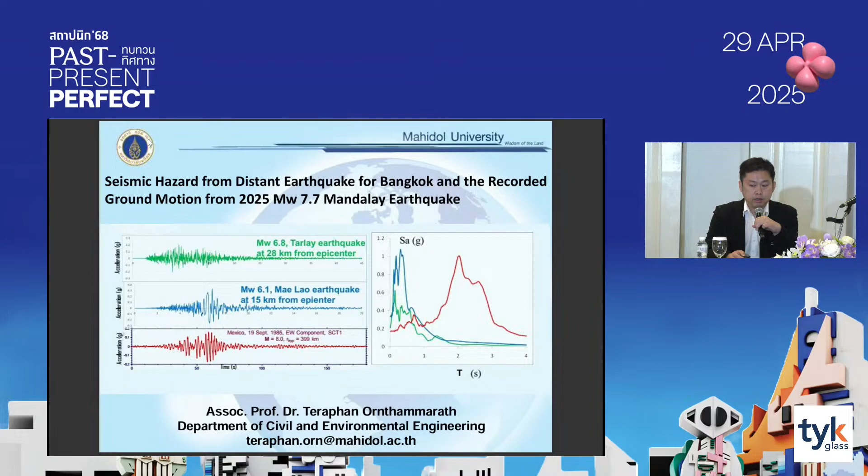In Bangkok, we did not have high-rise buildings, we have only small buildings, and the people in Bangkok could feel it quite strongly, causing alarm to the people, and people ran from their houses into the street. So it's exactly what we observed last month. So it's not something that we didn't expect. We expect this kind of event, but we cannot tell when it's going to happen, but we know it's going to come.

And in 1930, on 5th May, this is the event in Myanmar, 7.3 in Bago, along the Sagaing fault. That is very similar to this event also, but from different segments of the same fault.

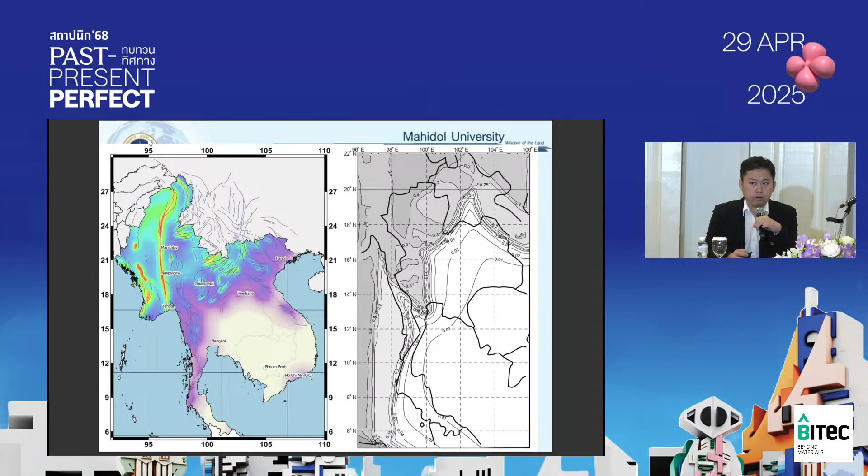This is the major cities in northern Southeast Asia that have different seismic hazard, like in the red line that is Naypyidaw, and on the blue line is Mandalay. So at the same hazard, we expect that Naypyidaw and Mandalay would have the highest seismic hazard, mostly from the Sagaing Fault. Other major cities in northern Southeast Asia also have different distributions of the hazard.

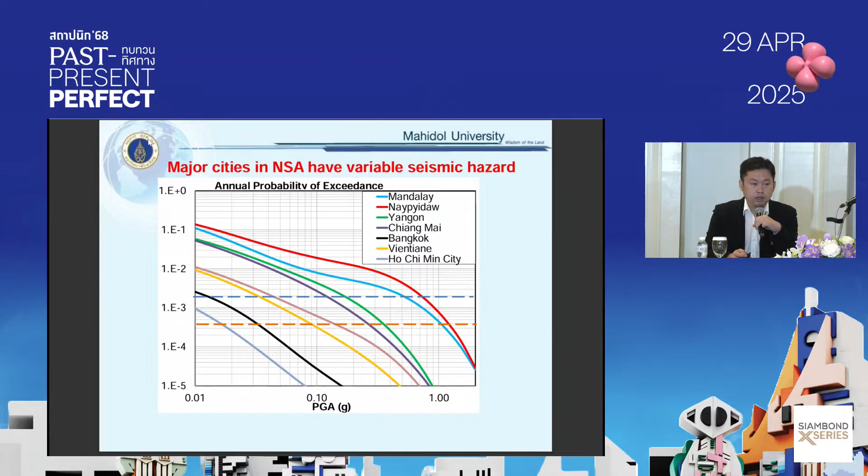And when we do the deaggregation, meaning when we know what is the level of the hazard, we want to know what is causing the earthquake that's going to cause the hazard. So this graph might be a little bit difficult for you to understand, but I would explain.

On one side you will see the magnitude, on the other side, the X axis, you will see the distance. So for Mandalay and Yangon, the hazard mostly comes from large magnitude earthquakes, like magnitude 7, at very short distance. That is what we expect from the Sagaing Fault.

But if we look at other cities like Bangkok, on the bottom, you see that for the peak ground acceleration and spectral acceleration, it always comes from distant earthquakes. So based on our model, we know that the hazard for earthquake in Bangkok is going to come from distant large earthquakes. It's not going to be a small or large earthquake inside Bangkok, because Bangkok does not have an active fault. So when we know this, this is the hazard that should be considered in the model.

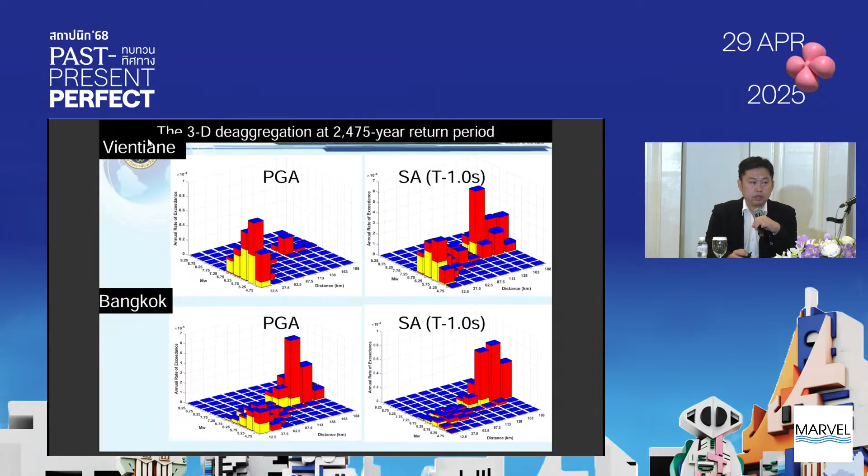So what did we do when we try to give the seismic design code for the engineer? Before going to that, I would like to take some time to talk about the ones that we're still afraid are going to occur.

So the first one is the Sagaing Fault that already occurred, the 7.7. Another one is Kanchanaburi, that is the Three Pagoda Fault. The one that we think might have the potential is the subduction zone in Myanmar.

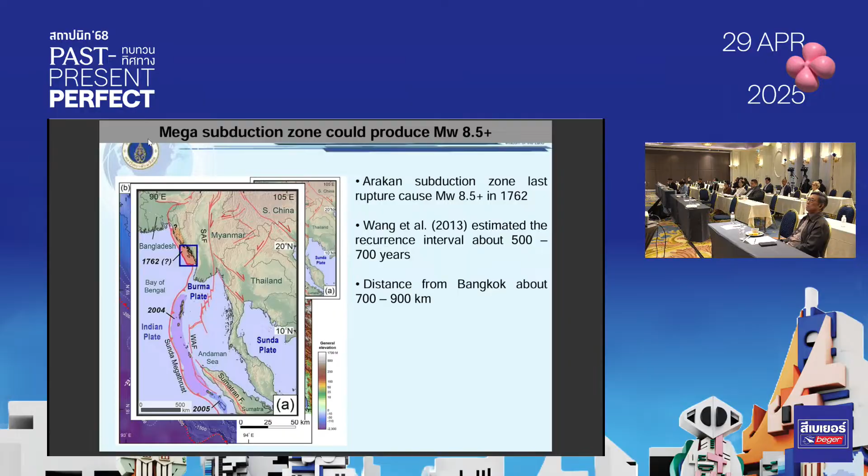In the past, there is a record in 1762. It generated a magnitude greater than 8.5. Some studies found that the recurrence interval is about 500 or 700 years, and the distance from this subduction zone to Bangkok is about 700 to 900 kilometers.

And this is the evidence from the fieldwork that they did. They went to the coastal area and found an uplifted oyster reef that had been uplifted due to the earthquake in 1762. The uplift is about 1 to 6 meters. If we consider this caused by that earthquake, they did carbon dating, and the carbon dating also shows that this is at the same time as the historical record.

So it is confirmed that the subduction zone is there, and it's still quiet. It hasn't reached its recurrent interval yet, but that is the thing that we understand should be considered when we do the seismic design.

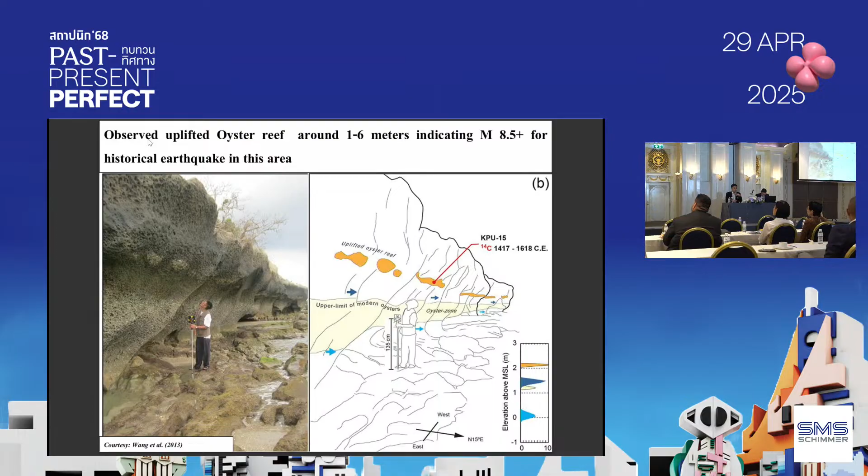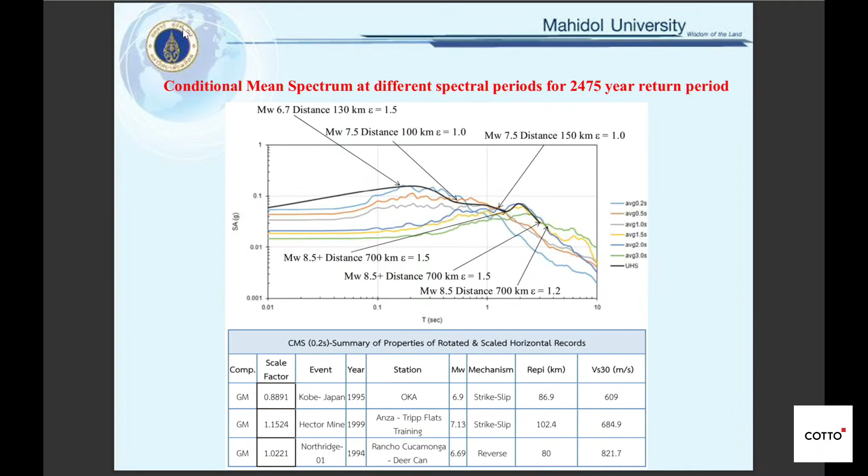So when we do the seismic design code, engineers usually use response spectrum, and different response spectrum causes vibration in different structures. Like for the short period, it would cause large vibration for the small building, but at the long period, like 1 second, 2 seconds, and 3 seconds, it would cause vibration in the tall building. So for 1 or 2 or 3 seconds, this is the distant large earthquake, like subduction zone earthquake.

And then we select the ground motion that fits well with what we consider would be like magnitude 8 at a distance around 7 or 800 kilometers away. So this is the one that we use to develop the Bangkok seismic design code.

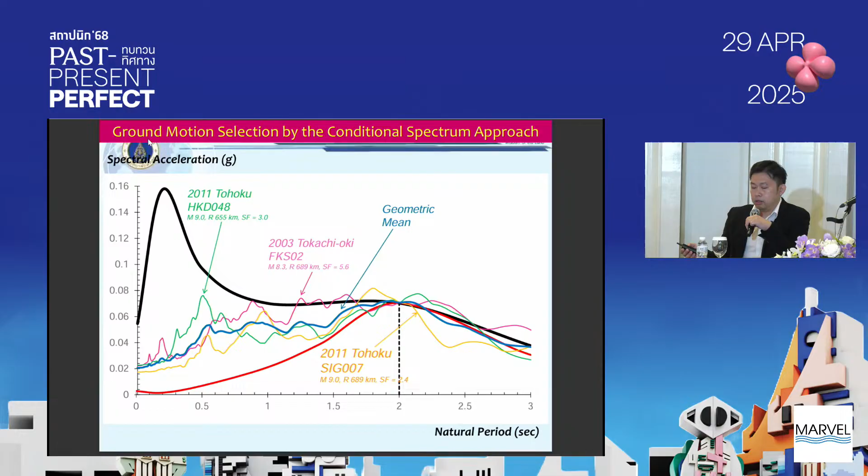And this is the response spectrum from the ground motion that we think could have impact in Bangkok, but this one is on the rock. After that, we do the measurement for the shear wave velocity in Bangkok, and then we do the ground response analysis to consider the soil amplification.

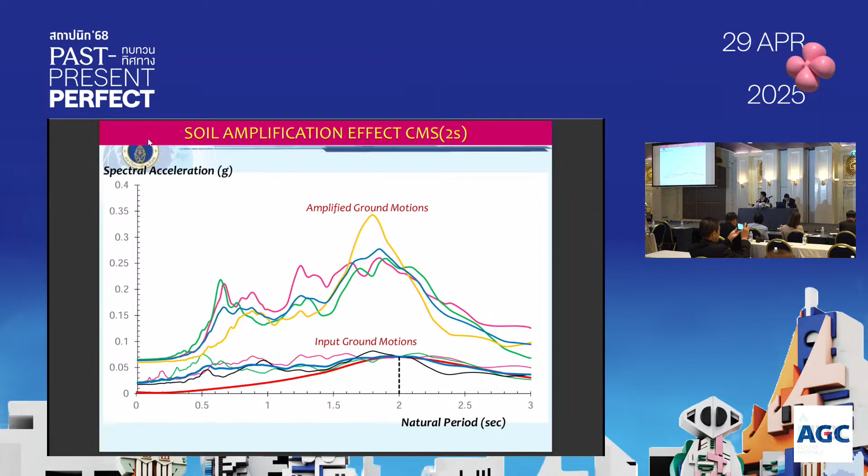So this one is on the bedrock, and then it has been amplified by using the data that we have. So the ground motion in Bangkok has been amplified due to the soil model that we have. And then this is the input ground motion on the rock, and this is the amplified ground motion.

So this one is the one that we have studied, and then we use it in order to tell the engineer that this is the level of design that you should use. And this blue line is the average. That is the value that engineers have been asked to design according to our seismic design code.

When we published this, a lot of engineers asked how reasonable this seismic design spectrum is, because it's quite large, and people in Bangkok did not feel earthquakes that often. So there is some resistance, and engineers start to question more when they need to put more reinforcement into the structure. But anyway, this is the seismic design code in the Bangkok area.

We put it in different zones, and the downtown of Bangkok is zone 5. So it's quite a different spectrum. If you consider a normal spectrum from the textbook, it would be very high value at a short period. But you can see that the seismic design for Bangkok amplifies the long period like 1 sec, 2 sec, or 3 sec. So it's quite an unusual spectrum compared to the design spectrum for many places around the world.

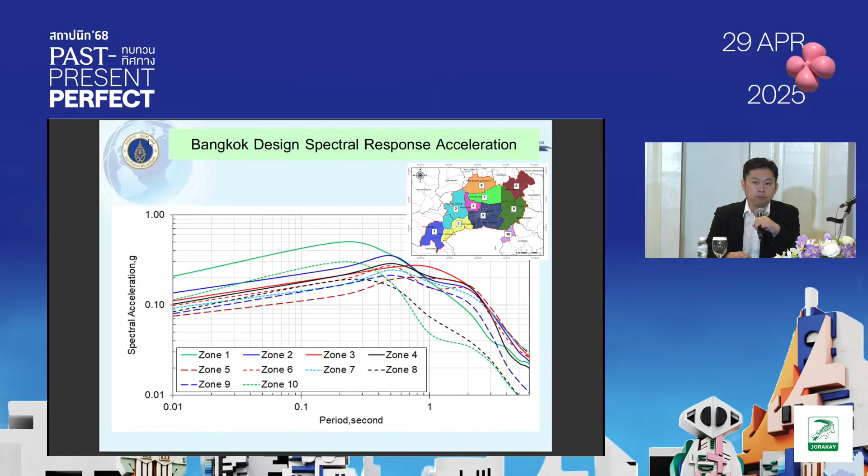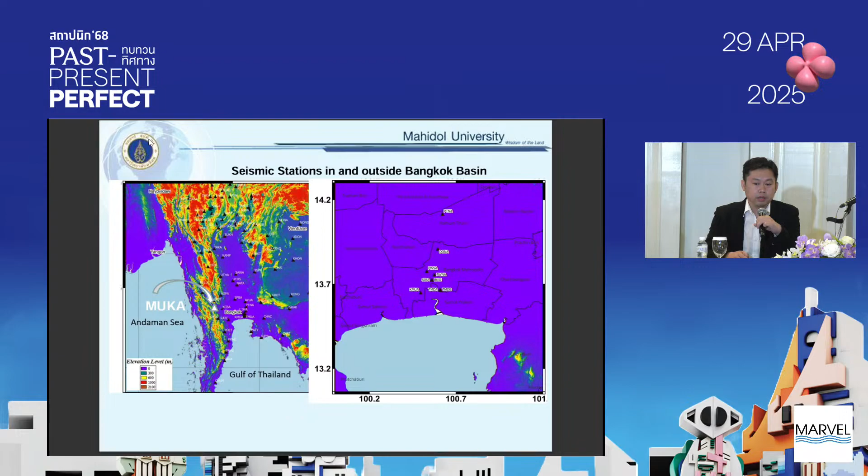Okay, so let's talk about last month's earthquake and what we observed from the record that we have, and then let's compare with our seismic design spectrum. So luckily in Bangkok, we have a number of seismic stations operated by the Thai Meteorological Department. And I would like to compare this spectrum with the one that we have stationed in Kanchanaburi.

Kanchanaburi is the station on rock, so there's a difference from the basin. What you see, the purple line, is the elevation model. You can see that the central plain of Thailand, including Bangkok, is a low-lying plain, that is a sedimentary basin. So outside Bangkok, that is Kanchanaburi, is already outside the basin. So we're going to compare the effect of the basin and without the basin.

So this is the ground motion that we recorded in Kanchanaburi. We plot it on the same scale, and this one is recorded in Bangkok. So you can see that the peak ground acceleration in Kanchanaburi is just 0.006 G, very low. But in Bangkok, it goes to 0.02 G. So the amplification is real. We see the amplification about 3 times.

But not only that, the duration in Kanchanaburi is just about 40 seconds. But in Bangkok, we see the duration amplified to about 150 seconds. So Bangkok is farther from the earthquake, but we feel larger ground motion. Not only larger ground motion, we feel it longer. That is the perfect storm for the tall building.

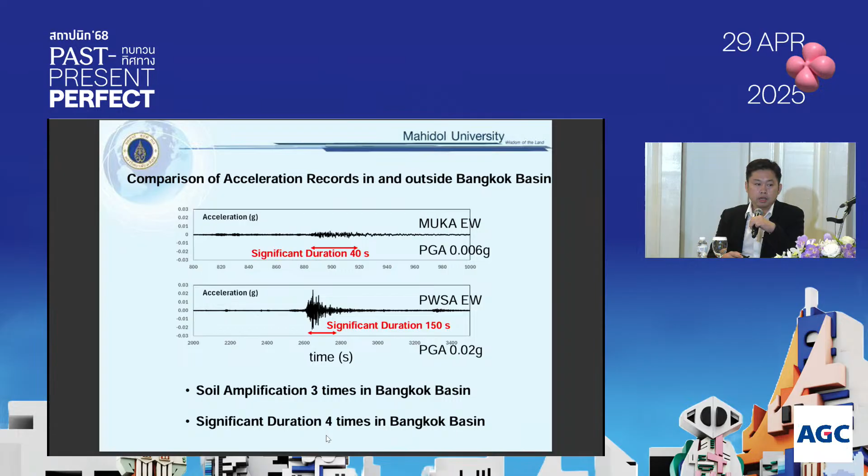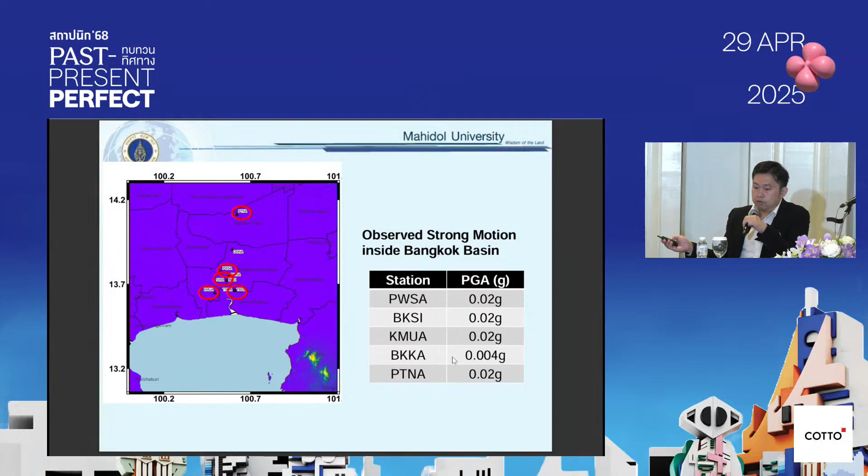And luckily we have a station inside Bangkok, and this station can record the peak ground acceleration mostly consistently about 0.02 G. There's one station that is quite low, maybe there's a malfunction. We need to do more investigation.

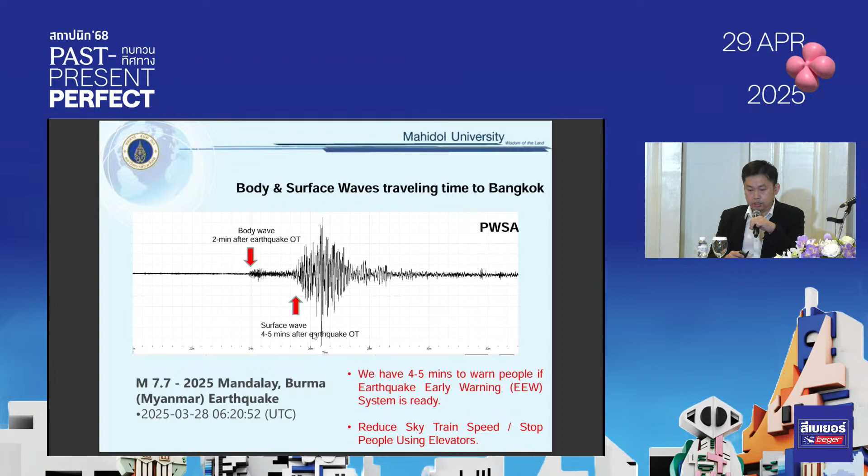So in Bangkok, if we develop an earthquake early warning system, we have a high chance that we can succeed in warning the people in Bangkok maybe 4 to 5 minutes ahead. So we can reduce the sky train speed or prevent people from using the lift. So this is one thing we may be able to improve in the future.

And this one is a record on the ground. So it means that if you were on the ground in Bangkok on that day, you would feel the large shaking for about 3 minutes. But if you're on a high-rise building, you might feel it longer and stronger than this. So if we compare with the USGS value of 0.02G, you might feel like MMI 4, a little bit dizzy if you stand on the ground.

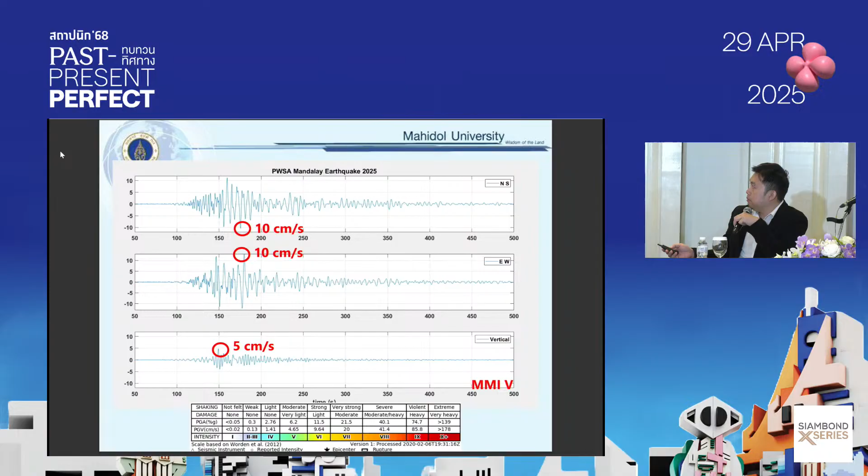And this one is the peak ground velocity. We usually compare the damage with the velocity. For the velocity, we see about 10 centimeters per second for the north-south, and east-west also, but for the vertical it's a little bit lower. For the MMI, it would be 5. So people might feel quite strong shaking for this earthquake.

Well, it's the same as what we have been reading, right? From the history, like in 1930, they must have felt the same thing as what we felt last month.

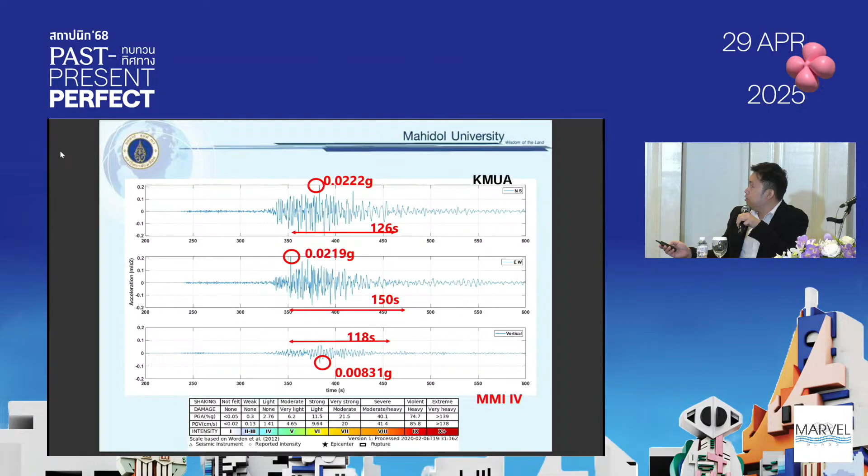And this is from another station, also the same, the graph is consistent. It has a long duration, almost 3 minutes. And the peak ground acceleration is also the same, like 0.02G. And this one is the peak ground velocity, the same.

And if we use the data from the USGS, they also say that inside the Bangkok area, they feel about MMI 5, and outside it, they feel about 4. So this is the record, and the intensity that people felt is the same. So this is confirmed.

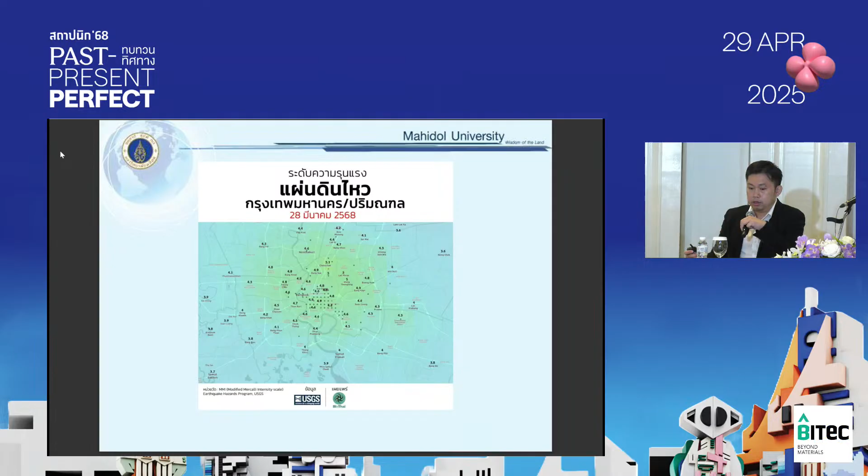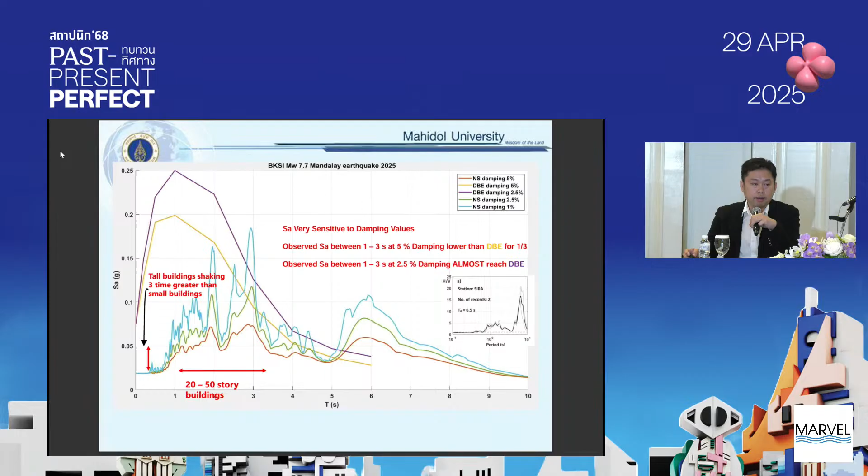So I would say that most of the tall buildings in Bangkok, if designed correctly following the seismic design code, should not have much damage to the structural part, but they might have some damage to the non-structural part, like cracking of the infill wall. The structural part should be safe.

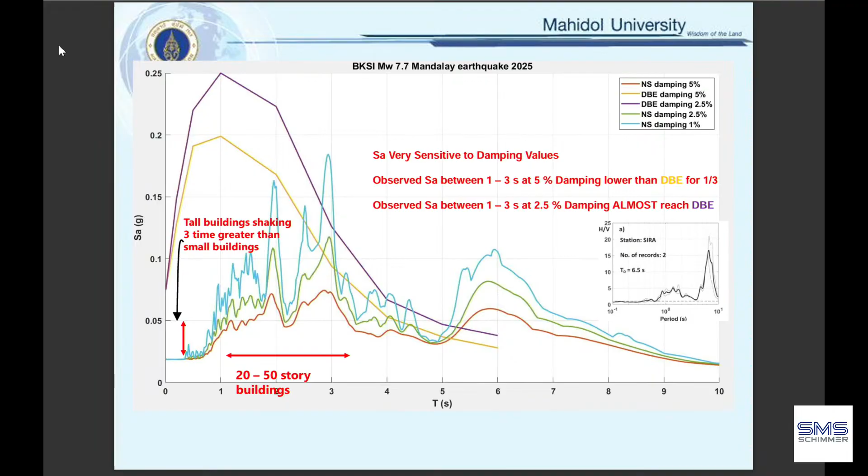Because when we look at the value, it's still below, but it looks quite too close. After this earthquake, we have a lot of data, so maybe in the future we're going to improve our seismic design code again. We have to revise it based on the new information that we have.

Because in some buildings, like tall buildings, we do install instruments, and the damping could be around 1% also. So we might need to have a new spectrum for 1% damping high-rise buildings. And also, we might need to extend our spectrum to be more than 6 seconds, because currently we can just provide until 6 seconds, but we see the amplification at 6 seconds also.

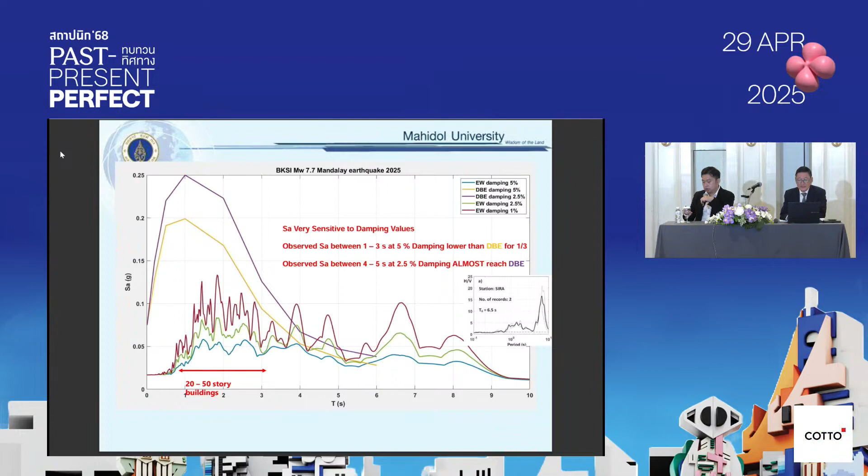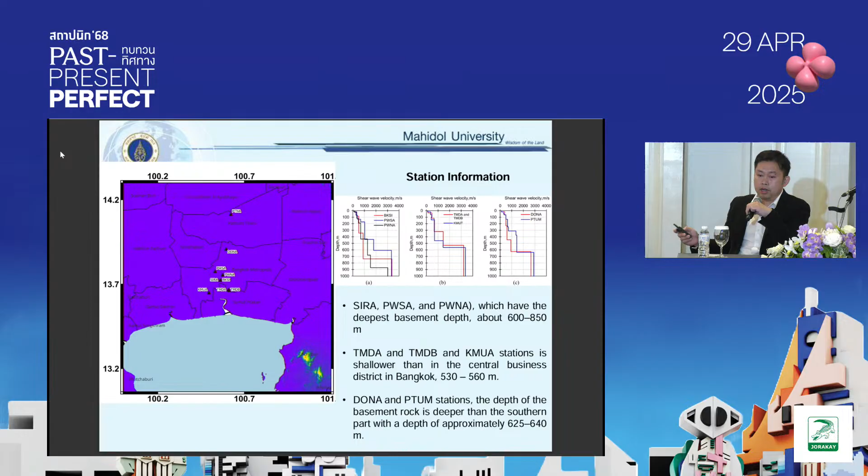So the depth varies, and the depth variation also controls the fundamental period of the basin. Like this is in Pathum Thani, you can see that the zigzag is quite low, and then the amplification for different damping is also quite low compared to the one inside Bangkok. So this is what we're going to study further, that maybe there is some difference in amplification at different locations also. This one is north-south, this one is east-west.

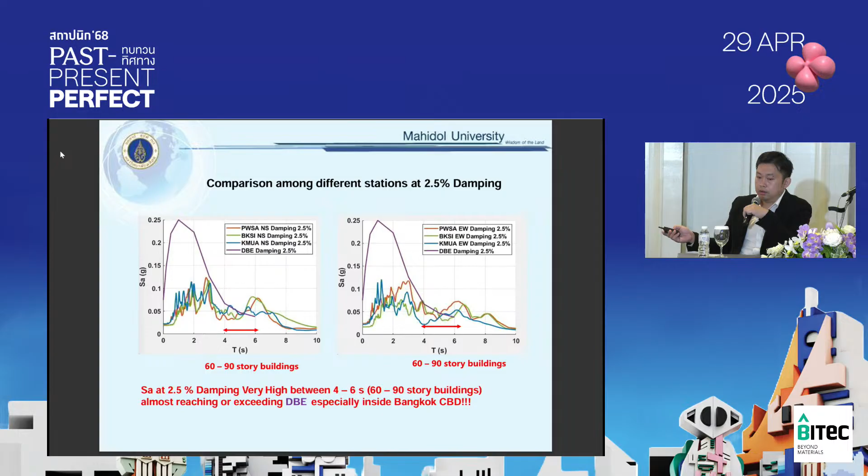And this is the comparison for different stations. It looks more or less the same, but everything is still under the seismic design code, except in the long period range where we don't have much, like more than 90-story buildings.

So to sum it up, I would say that Bangkok seismic hazard for high-rise buildings is controlled by large and distant earthquakes. Bangkok seismic stations amplify both amplitude and duration compared to stations outside the basin. Most long period energy content is located when the surface wave arrives. The high spectral acceleration could be observed at low damping, like for tall buildings, 2.5% or 1%.

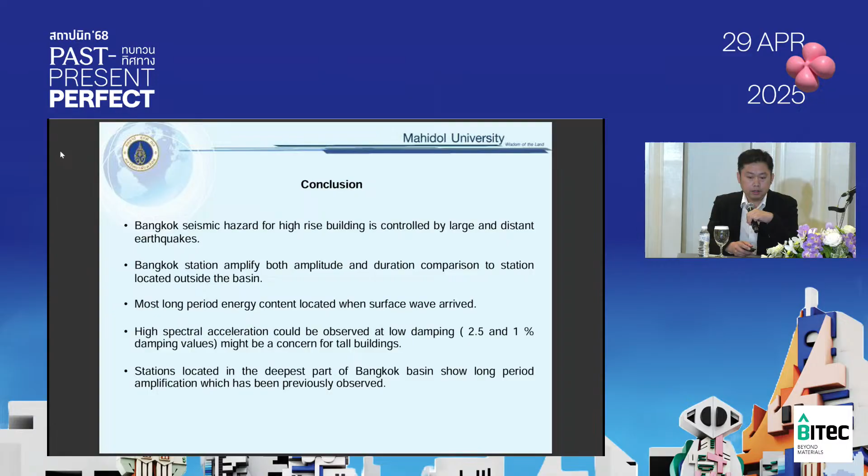Then we need to revise the seismic design code again. Stations located in the deepest part of the Bangkok basin show long period amplification also. So this is going to be the one we need to work more on to protect our tall buildings in Bangkok. Thank you.

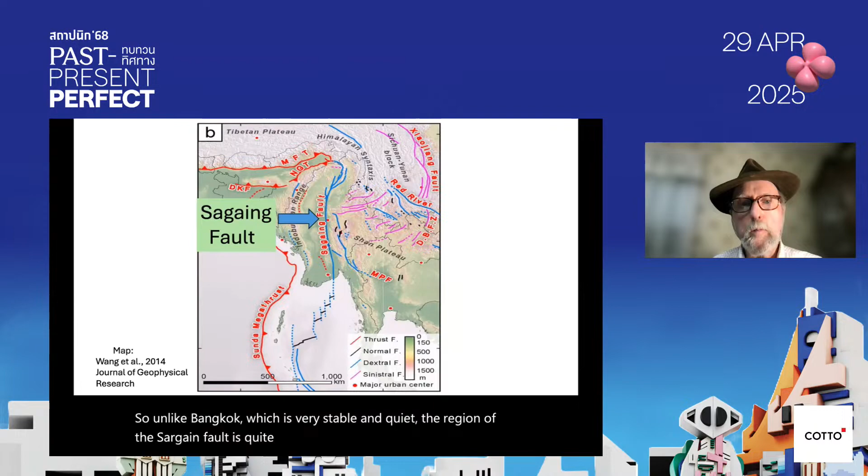We will see this location map probably several times because it's an excellent summary by Wang et al. from 2014, showing in blue the Sagaing Fault and in red some of the surrounding faults. So what's going on here? Why do we have such strong earthquakes at this location?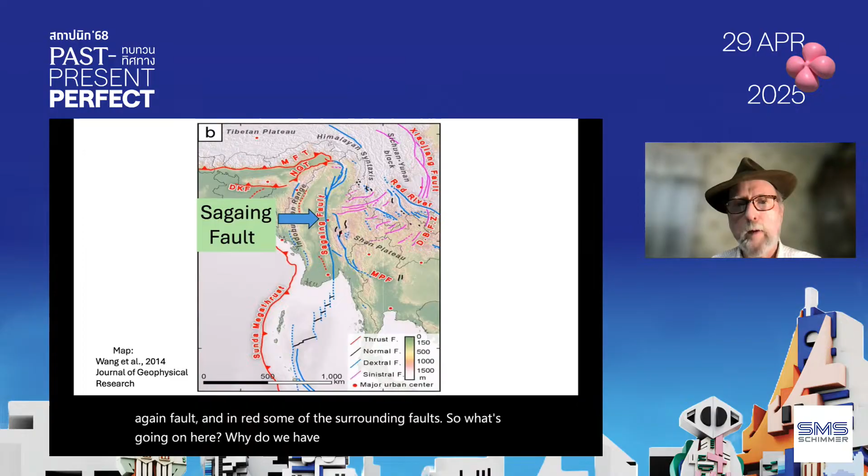As you'll recall from your studies, India is moving north into Asia, colliding to build the Himalayan mountains and the Tibetan plateau, while China and Thailand are moving to the south. The Sagaing Fault is the strike-slip fault that accommodates the motion between India and Southeast Asia. So it's a very important, fundamental fault—very active, with constant buildup of strain.

Let's take a look a little closer at this fault where it occupies central Burma. Here we see a pretty complicated diagram with the Indo-Burma range off to the west, the Burma Basin in the center of the image, and the Sagaing Fault on the east side.

The rupture is shown in red. One of the reasons why this fault and this earthquake was so damaging was that it occurred in a very highly populated region, a relatively flat-lying agricultural region with a big population density.

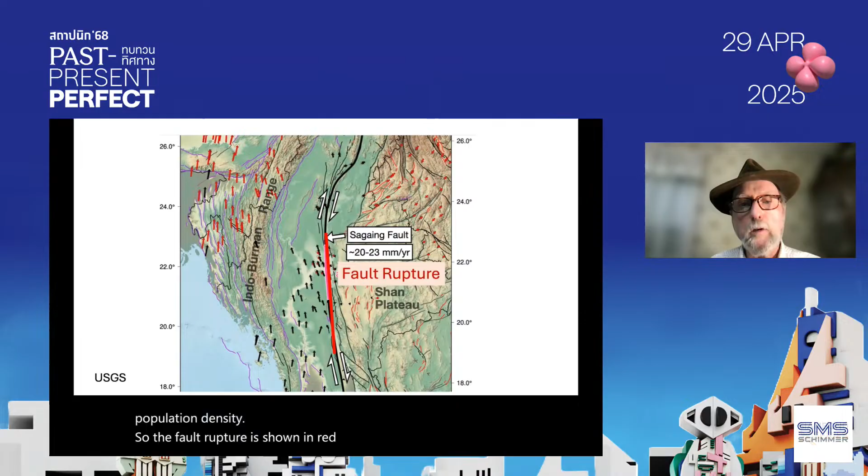The fault rupture extends for about 400 kilometers. The Sagaing Fault has a buildup of strain of 20 to 23 millimeters a year—let's put that in simple terms, about 2 centimeters a year. That means in 200 years, there will be an accumulation of earthquake strain reaching 400 centimeters, that is 4 meters. That's enough to create a magnitude 7.7 earthquake, 4 meters of slip on an important fault.

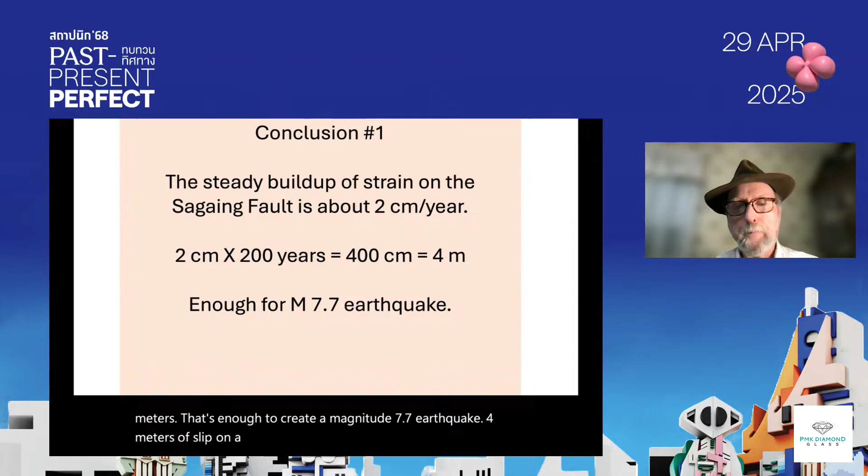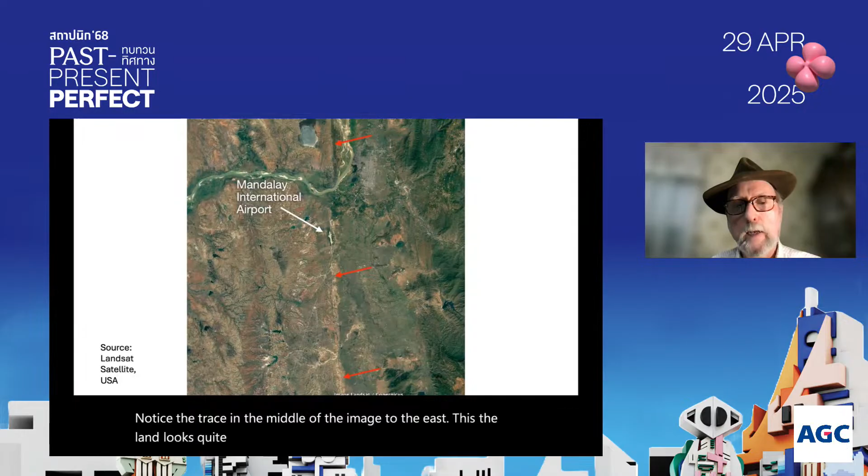This is exactly what happened on March 28, 2025. We can see this fault very easily from Landsat satellite imagery. Notice the trace in the middle of the image. To the east, the land looks quite different—a lot greener, a lot more vegetation.

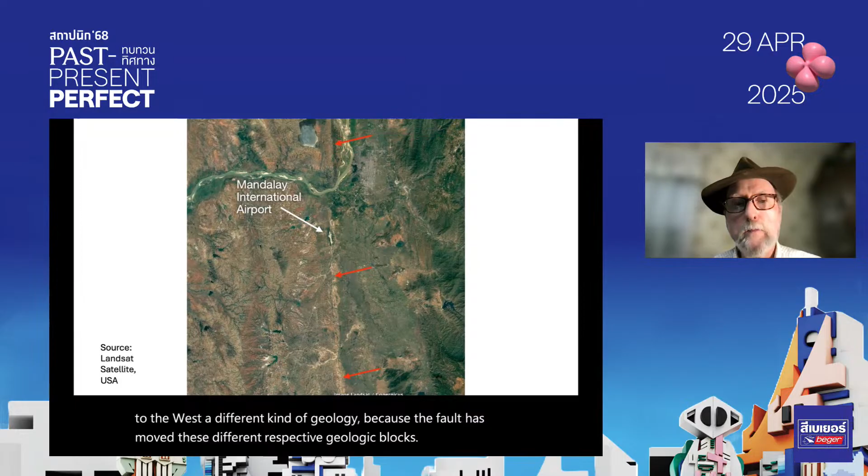And to the west, a different kind of geology, because the fault has moved these different geologic blocks many hundreds of kilometers. Even the river—you can see how it used to flow to the south, but on the west side it's been transported to the north, and it makes a bend as it crosses the fault.

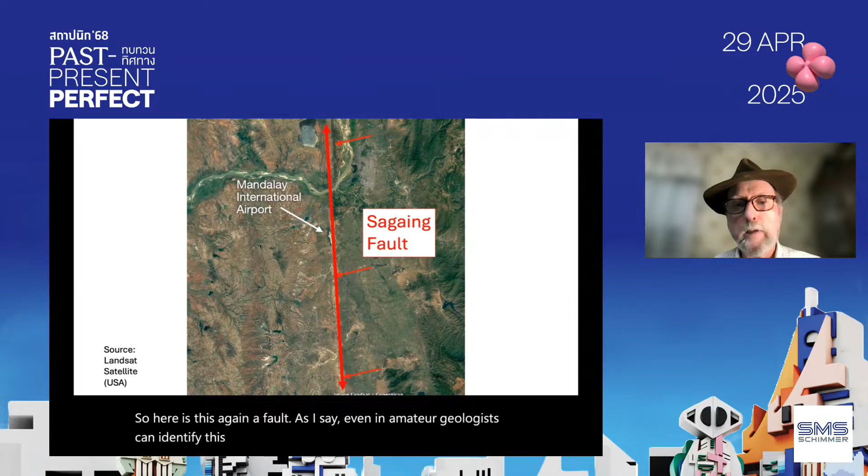As I say, even an amateur geologist can identify this and would immediately recognize it as an earthquake fault with a very high potential and very great hazard to the local population. So the cause of this earthquake is well understood. The hazard posed by the central Sagaing Fault has long been known to earth scientists and was widely reported.

It showed up very clearly in the earthquake hazard map of the previous speaker, who showed it as a very bright red patch in his presentation as well.

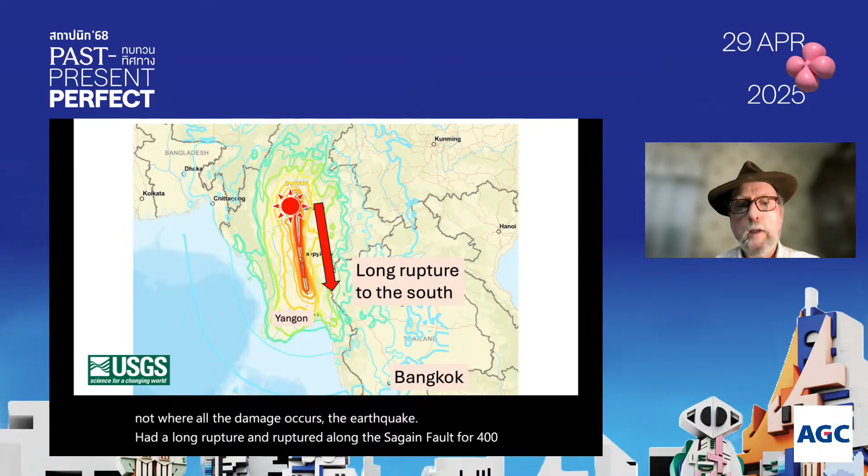So this is what happened during this earthquake: it initiated near the city of Mandalay. We call that the epicenter, but that is not where all the damage occurs. The earthquake had a long rupture along the Sagaing Fault for 400 kilometers to the south, approaching closer to Bangkok than the epicentral region. So the epicenter is just the initiation of the earthquake—it's not the whole earthquake by any means.

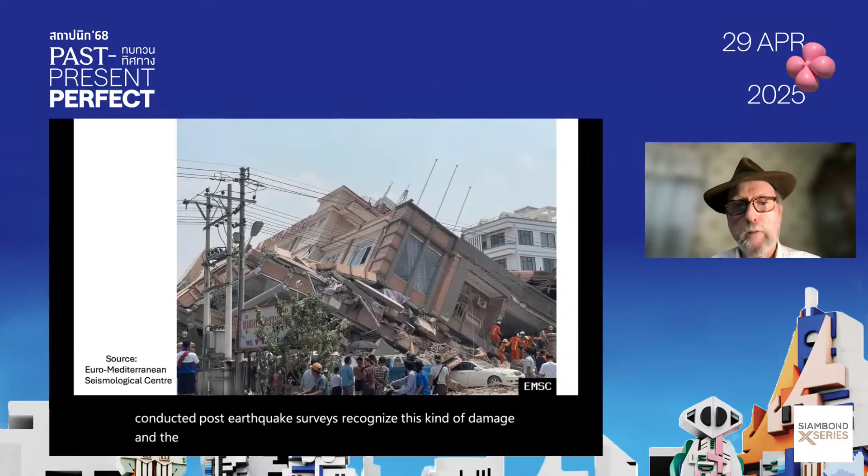The consequences are well known to all of you, and those who've conducted post-earthquake surveys recognize this kind of damage and the engineering problems that give rise to pancaking of floors and so on. This is not my topic today—I will not talk about the structural problems.

About 12 to 24 hours after the earthquake occurred, the USGS issued an estimate of the fatalities—over 10,000, somewhere between 10,000 and 100,000.

So far, the reports published in Myanmar list 5,370 fatalities. I cannot say with assurance, but it seems possible, perhaps even likely, that this number is currently an underestimate, and the total number will be in excess of 10,000, unfortunately.

Economic losses: USGS estimated anywhere between 10 billion and 100 billion dollars in losses. So conclusion number 3 from USGS is that the estimated fatalities and economic losses may be revised upward in the future. The estimates I'm reporting today are based on the current news we're able to obtain from Myanmar.

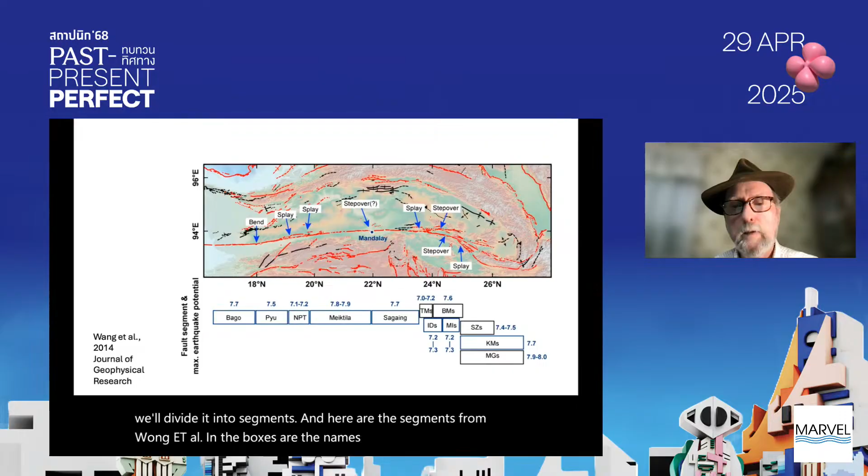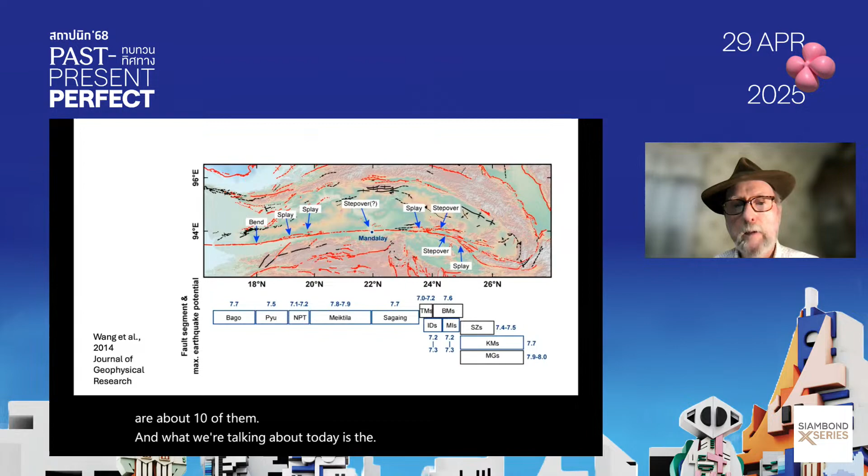What we're talking about today is the Meiktila segment, which Wang et al. estimated had a potential for an earthquake of magnitude 7.8 to 7.9. I just showed you the calculation indicating that about 4 meters of slip could occur in a period if the fault was quiet for 200 years.

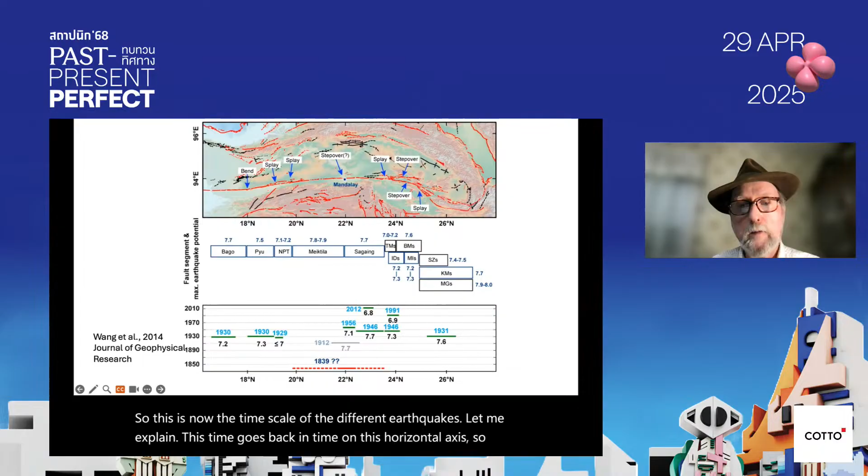So this is now the time scale of the different earthquakes. Let me explain this: time goes back on this horizontal axis. So 2012 is here, 1956, and 1839 goes back.

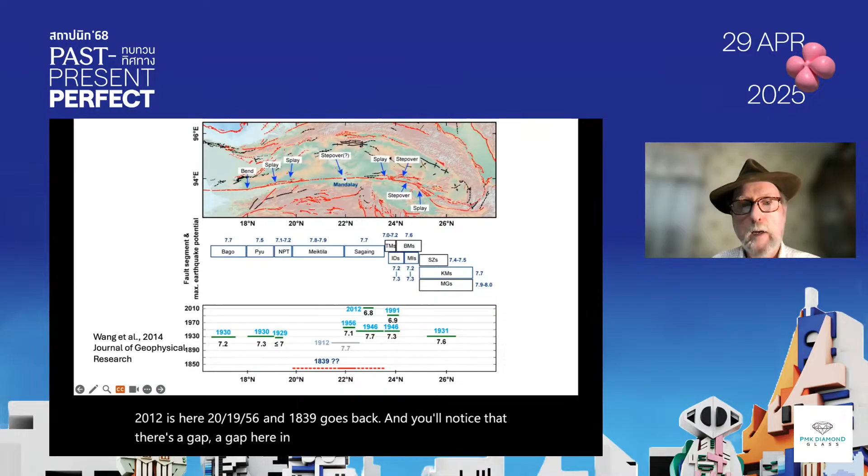You'll notice there's a gap here in earthquakes in the region of the central Sagaing Fault. In this portion of the fault, there had been an earthquake in 1929 to the south and to the north in 1956, but in the middle there was an earthquake gap. The previous earthquake had been 1839 or 1837, about 190 years ago. We can use round numbers: about 200 years of no earthquake on this central portion of the fault.

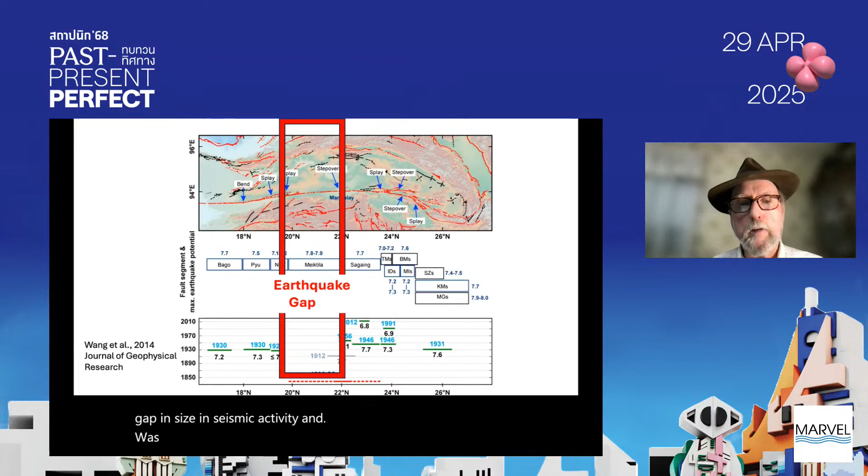So this was a clear gap in seismic activity, and was predicted to generate an earthquake of about what we got, about 7.7. So conclusion number 4: earthquakes cannot be predicted. However, earthquake probabilities can be calculated from scientific data. An earthquake prediction is the time, place, and magnitude precisely. Earthquake probability is the probabilistic description of the likelihood, in a general period of time, for the earthquake to occur.

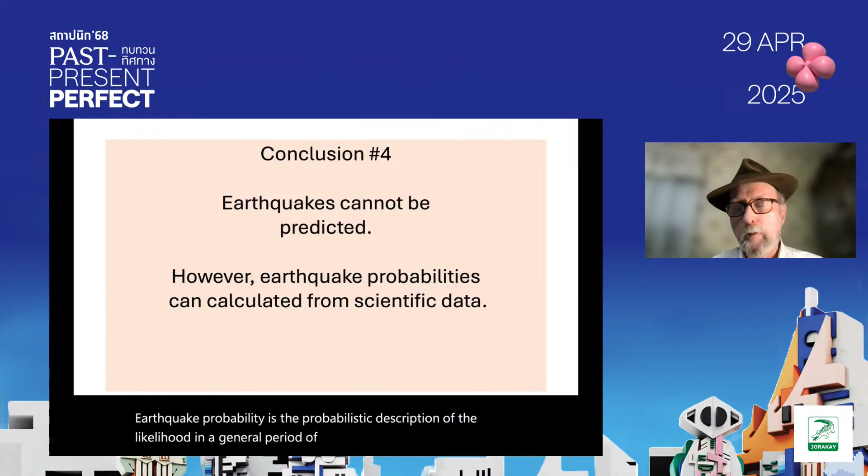Wang et al. 2014 correctly forecast the long-term probability of a future large earthquake on the central Sagaing Fault. So we're doing our job. Who's we? We're geologists, earthquake geologists, geophysicists, geodesists, the earth sciences. People are doing their job and talking to each other and are able to identify likely locations for strong earthquakes.

So let's take a look at what this earthquake rupture looked like, because what I'm about to show you has a lot to say about what happened in Bangkok, what was experienced in Bangkok, and indeed in Myanmar. We're going to look at the rupture - looking into the earth like slicing a cake, looking at the surface of the fault that moved during the earthquake. We're opening the earth, slicing into it and looking at the fault surface. So here it is.

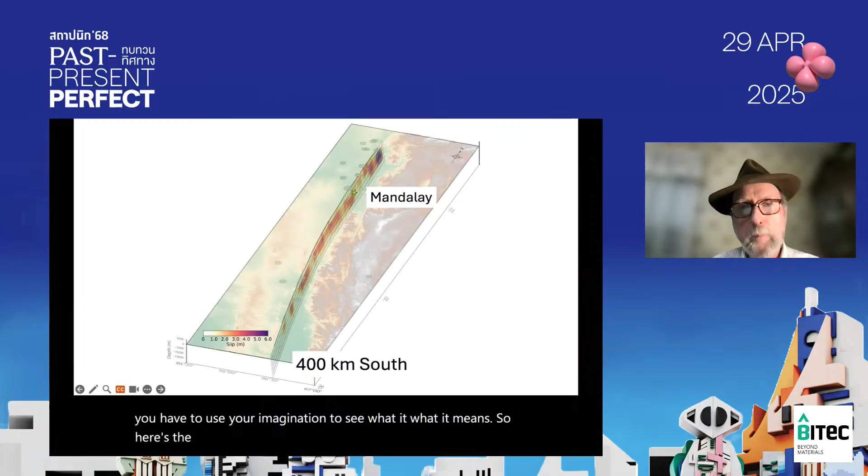Now I'll show this on top of the earth, and you'll have to use your imagination to see what it means. So here's the earthquake hypocenter, the buried earthquake source. The earthquake ruptured in two directions - we call this a bilateral earthquake. It ruptured very strongly to the north for about 75 kilometers, and it also propagated all the way to the south for about 400 kilometers in the direction of Bangkok.

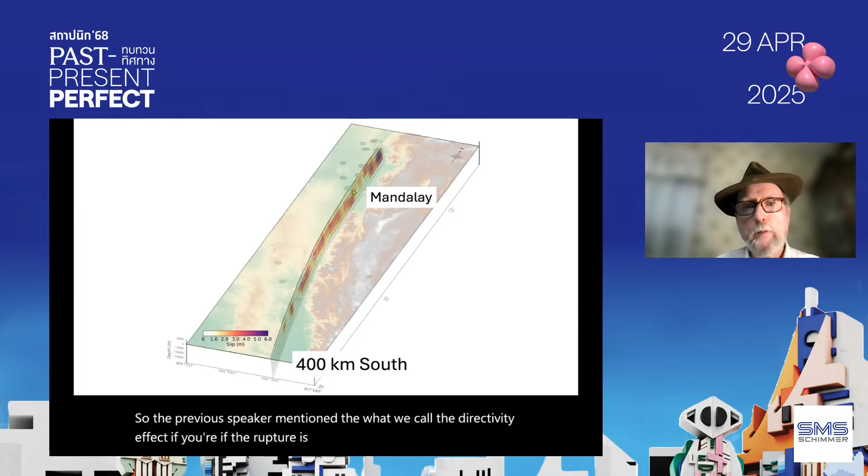So the previous speaker mentioned what we call the directivity effect. If the rupture is propagating to the south, there'll be a buildup of energy in the southerly direction, and this would amplify the earthquake ground motion.

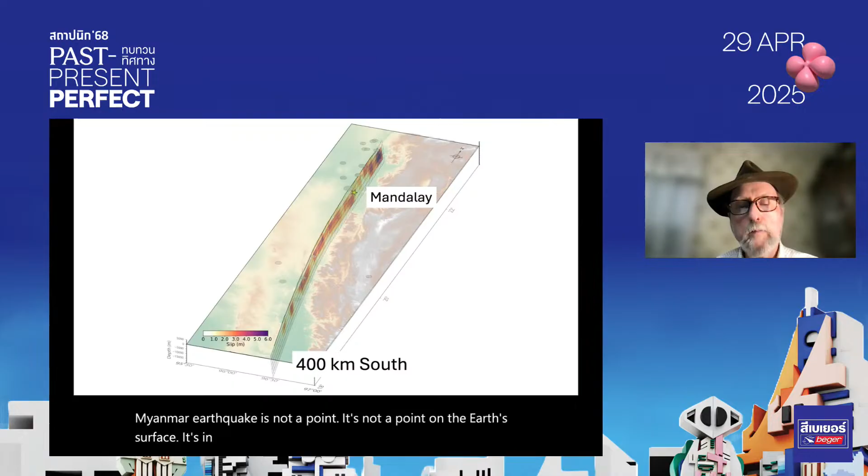So the March 28, 2025 Myanmar earthquake is not a point on the Earth's surface. It's in fact an earthquake fault that ruptured 400 plus 75 to the north, about 500 kilometers. It's a very big and extensive fault.

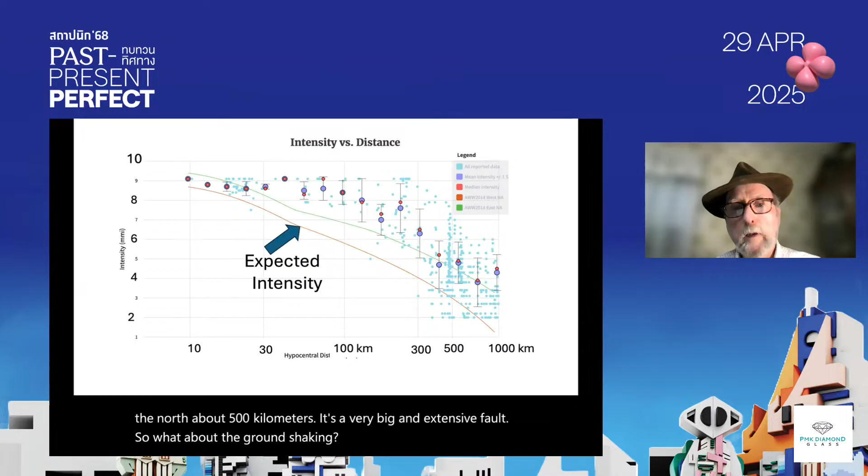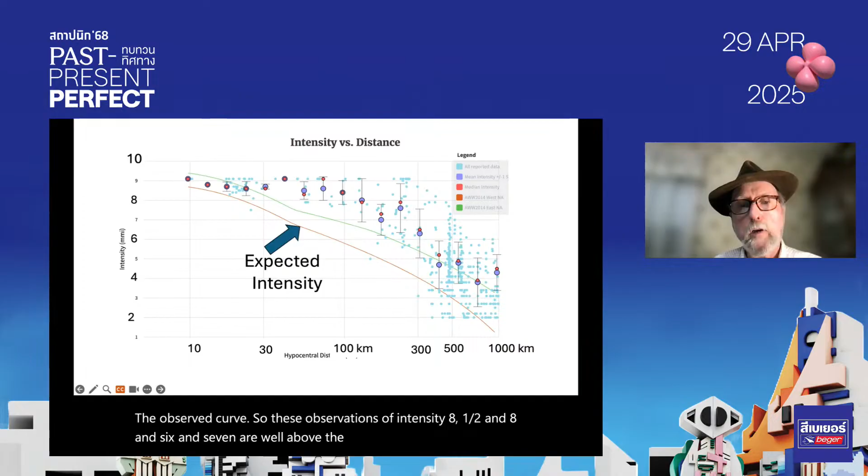So what about the ground shaking? Well, we geophysicists like to believe that we can predict pretty well the intensity of ground shaking as a function of distance. Here is a curve with the observations collected by USGS in purple and red, and the expected curve, which is well below the observed curve. So these observations of intensity 8.5 and 8 and 6 and 7 are well above the orange or green curve, two theoretical curves, as you can see here.

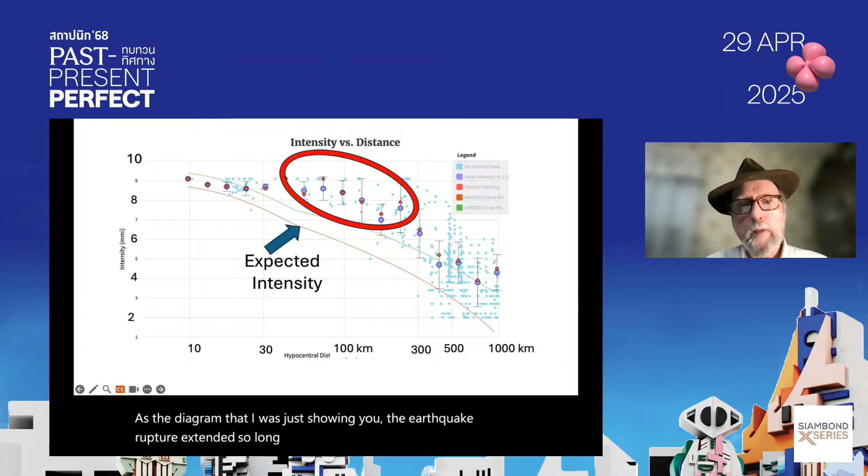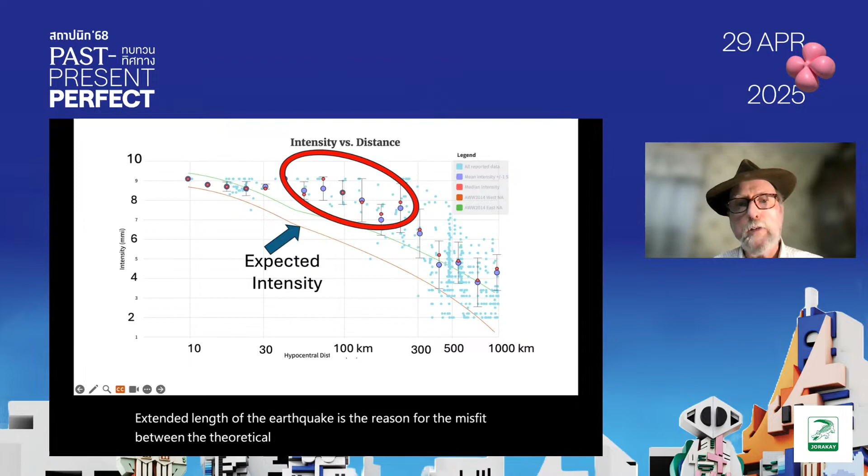The reason for this is exactly the same as the diagram I was just showing you. The earthquake rupture extended so long that even at 100 or 200 kilometers away from the hypocenter, the ground motion was very strong because the earthquake rupture was nearby these observation points. So the extended length of the earthquake is the reason for the misfit between the theoretical calculation, which is a simple model, versus what happened in Myanmar with this unusually ultra-long rupture. It extended the strong intensity and the strong motion over the length of this fault, causing widespread destruction.

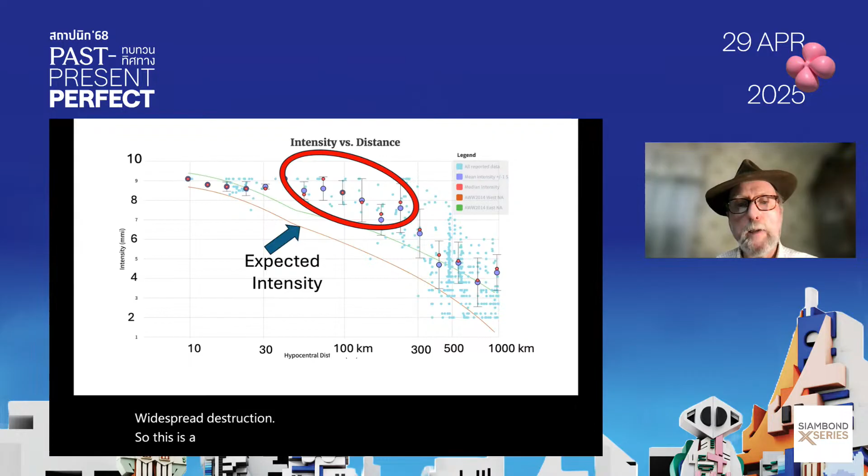So this is a quite unique earthquake by virtue of its length of rupture.

So we have an ultra-long rupture and a large amount of slip, 4 meters on parts of the fault, all of which conspire to make a really dangerous and catastrophic earthquake.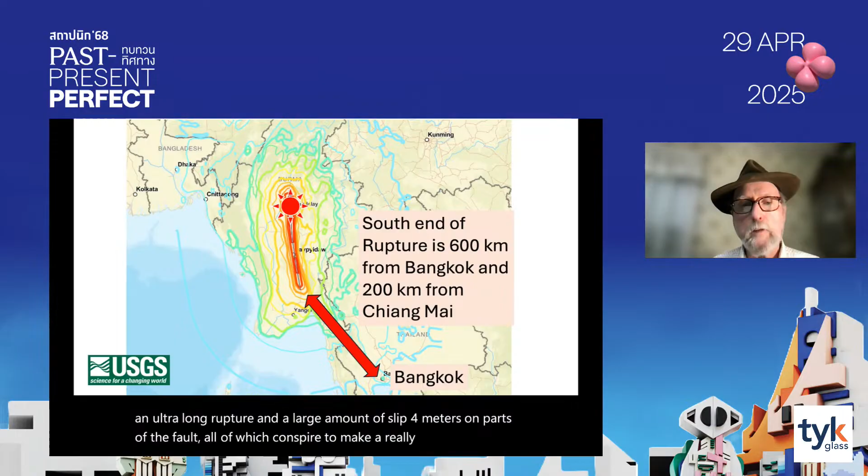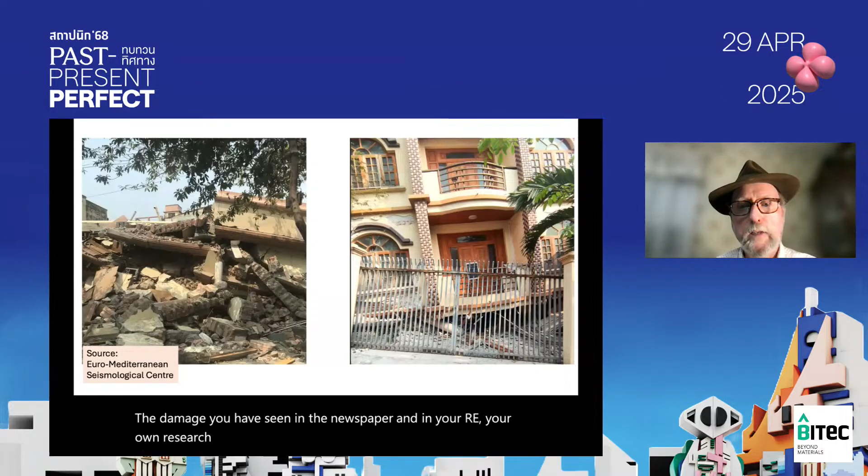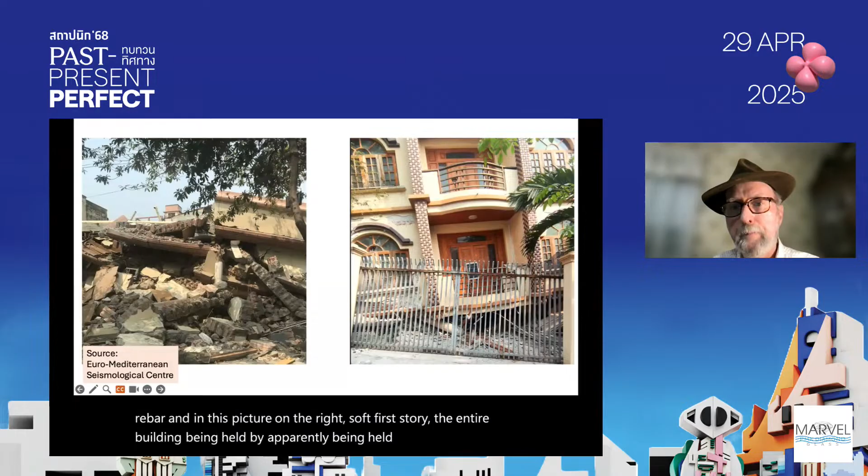The damage you have seen in the newspaper and in your own research - you can look at just these photos, it's a giveaway what are some of the problems in the construction: masonry with a minor amount of rebar, and in this picture on the right, a soft first story, the entire building apparently being held up by small columns that were not adequate for the task.

Thank you very much. This is my summary of the earthquake, what happened, and why we experienced what we did. I'd be delighted to take your questions.

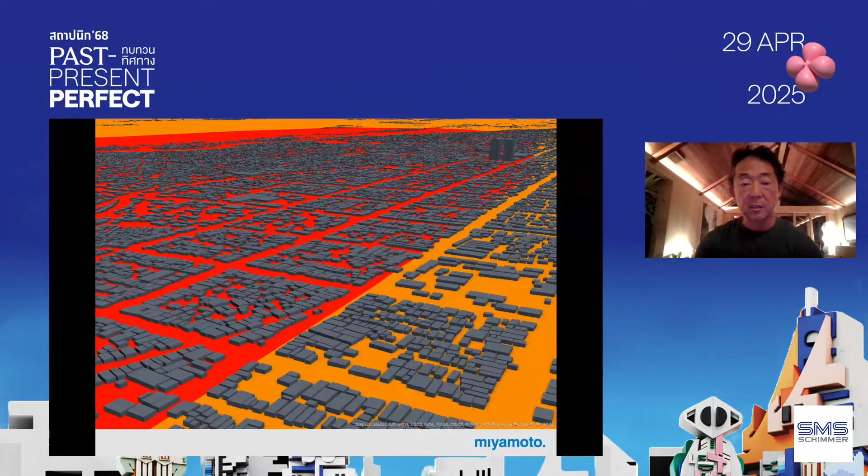So the first thing we did is use satellite imagery to understand the context of the exposure of this earthquake. Based on our analysis, not only from satellite but from ground recon we did, over the last 2 weeks we assessed over 100 different schools and hospitals throughout the area.

There are about 15 million people subject to strong ground motion, and about 500,000 buildings that are exposed.

They are mainly 1 to 2 story low-rise buildings, many houses, made of either unreinforced masonry or older concrete structures.

Based on past assessments we did for areas like this, with this type of ground motion, combined with the quantity of what's going on and the archetypes of the building stock that exist, we estimated 30% of these buildings, almost 150,000 buildings and houses, could be either collapsed or severely damaged. An additional 150,000 sustained moderate to slight damage. They're not habitable, so you're talking about 60% of buildings, which means almost 10 million people are not able to live in those houses.

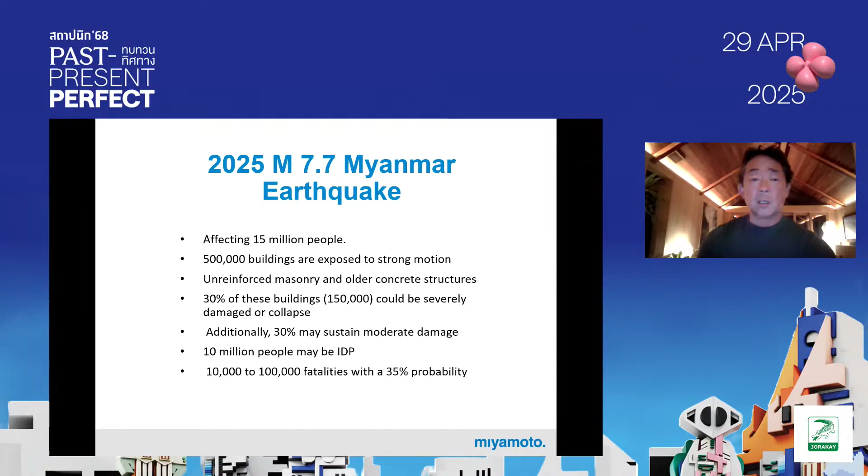For next steps, we have provided a critical infrastructure assessment with UNOPS and also UNESCO, focusing on healthcare and schools, and also some private structures, to understand what to do for residential structure assessment and a communication campaign attached to that. So we now have teams deployed on the field.

So let's come back to Bangkok. What's the impact here? In Bangkok, we changed the building code in 2007 and 2017. Anything built before 2007 is what we call non-ductile concrete structures, which means extremely dangerous - it doesn't really consider the earthquake effect at all. After that, it got a little better, not bad but not great. That's why you saw certain things happen in the city. In 2017, the code really changed to start understanding high-rise building construction and so on. But even that, long-distance earthquake effects were never really considered.

You can imagine jello on one side of a long table - you shake it on one side of the table and the jello shakes a lot, depending on how you shake it. And if you stick something tall, like a chopstick, it will swing even more. That's exactly what happened here.

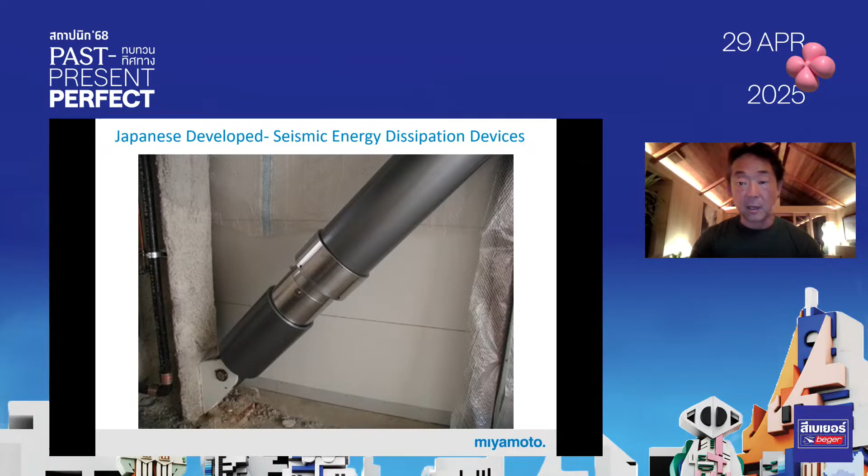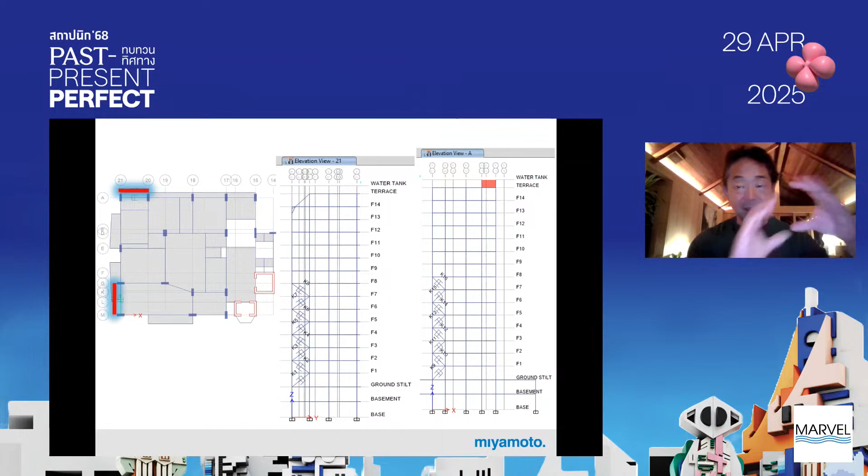So here's what dampers look like. On the left side, that's a plan view - you're looking down and you see a red mark, that's where we put the dampers. On the right side, that's an elevation view, looking from the side of the building, and you can see the location of the dampers. So it's not everywhere, just certain locations.

In this case, what we try to do is - this building twists a lot, so we provide these dampers to reduce the so-called torsional effect. That's the thing we're doing there.

It's really important to truly understand what the weakness of that structural system is, and surgically apply the technology to surgically remove the deficiency. That's important because it makes it feasible and cost effective. That's a very, very important thing to do.

Engineers, we want to make it perfect. We want to make everything good, fixed from the top to the bottom, or just throughout. But if you're doing that as a process, it's just not possible for the private sector to be able to pay for such a thing. So when we do things like that, it actually stops any kind of strengthening, and then we actually create a much more dangerous condition.

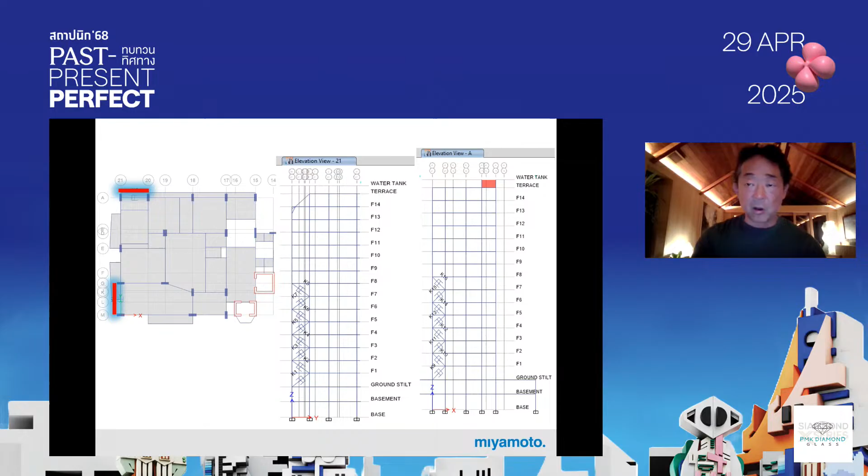That's why it's very important for us engineers and architects to really think about the investment components of it, so that we can create the market to do things like this. Because doing things like this actually adds value to the value of the construction itself. There's a market value that exists. That's a very important part of it.

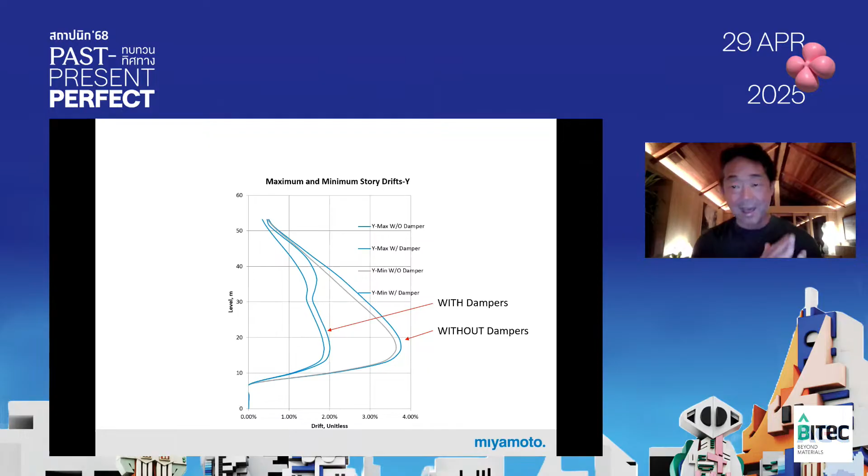Now looking at this graph, the vertical axis shows the height of the building and the horizontal axis shows how much it's moving. You can see that the movement of a structure at the very top is cut back in half just by adding a few locations of these damping devices.

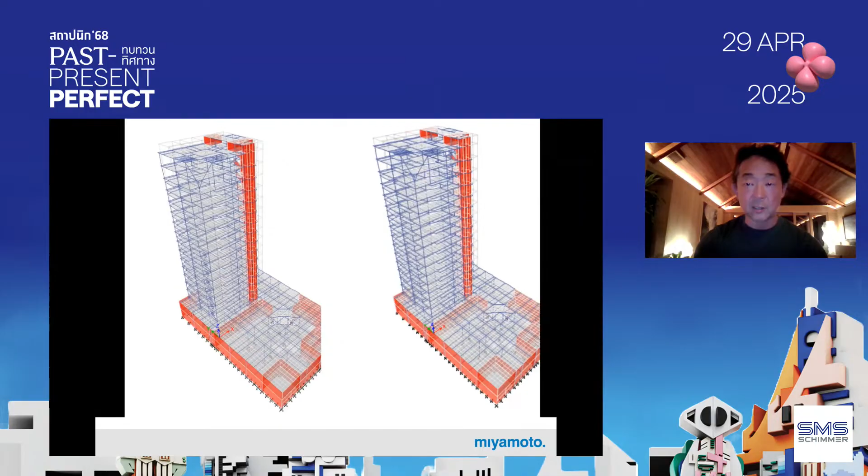So this is what it can look like. Structural engineering can be beautiful. I'm sure many architects in this room may agree.

So what needs to be done for existing commercial buildings? I think we need to really think - not like performance-based, where engineers like to say let's do life safety performance, or let's do collapse prevention performance. We can say anything we want. The problem is that if there's no money to be able to do that, nothing happens.

Even in places like California, there's actually a law passed - I'm talking about like 30 years ago, maybe 20, I don't know, it's a long time ago - to do seismic strengthening of hospitals to just at least meet the life safety performance per ASCE 41.

I think this ordinance was something like 2000-something, it's a while, long ago. Today, 2025, it has not been complied with yet. Not every hospital has done it. And now the deadline's pushed back to 2030, and most likely it's going to be pushed back again, because hospitals can't afford doing things like that.

So that's the whole point - it has to be cost effective. It's not about performance-based engineering. It's a question of how much investment can be made, and that should be the basis of design.

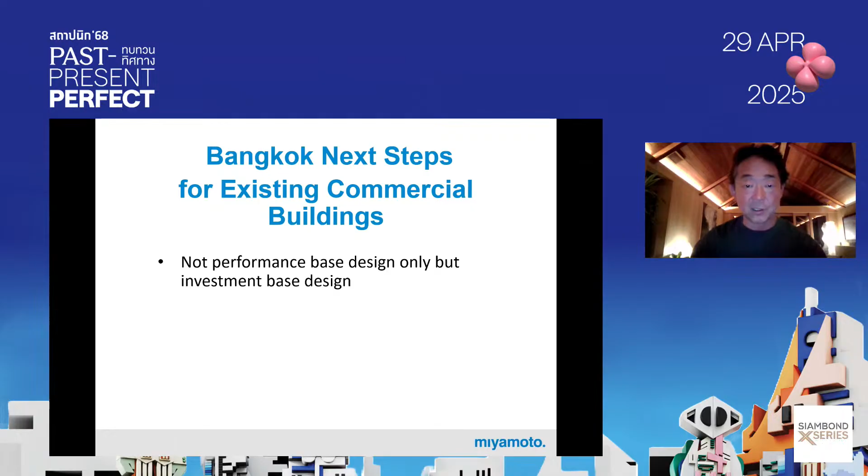So something like this - I think we should have a limited seismic strengthening cost less than, say, 5% of market value or something like that. And I know international funds are ready to provide liquidity to the market, directly to commercial banks, to provide very affordable liquidity and cash capital into the market to do this work.

If the government can provide certain property tax forgiveness—I know that here, Bangkok property tax for those high-rise buildings is around 0.3%—let's say if you can give forgiveness for the next 5 years, that provides cash flow to do things like this.

Is the government going to lose money? I don't think so, because that's going to create construction activities, and that itself will cause actual income too. So yes, government needs to be a part of this, no question.

But as engineers and architects, we need to really understand what we're going to ask society to do. We can ask anything we want, but if you ask too much, nothing will happen. This always happens everywhere in the world. We just got to make sure that risk is reduced, not eliminated, because it's not affordable. I think that's a very important lesson we learn from all over the world.

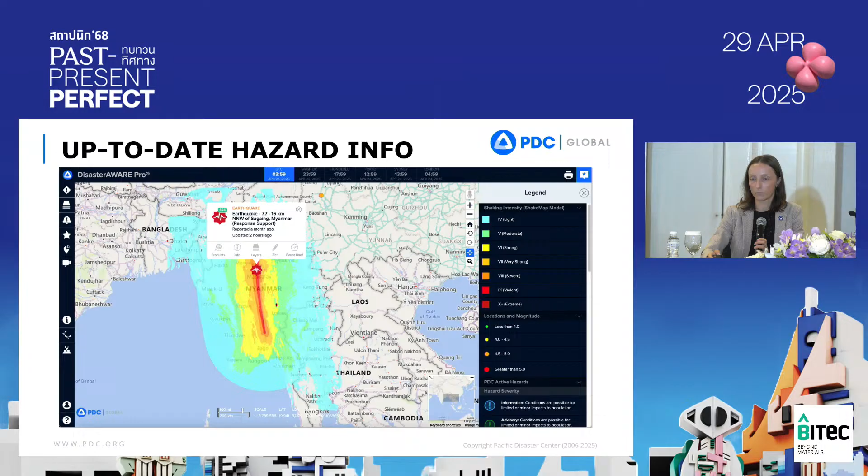And then, as well as being able to see that information, you can also overlay lots of other data like base map data in relation to critical infrastructure, population - you can bring in all of these data sets as well. We're working with lots of different data sources. I think DisasterAWARE has nearly 10,000 data layers in now, so many different useful data sets that can be overlaid on that user interface to see more information and understand the situation.

But we also work closely with the World Food Programme and UN OCHA to create what we call the Joint Analysis of Disaster Exposure. This is a specific product that we develop for large-scale events, and we work closely with WFP and OCHA, who provide us with some of the field data that we can then use to analyze the impacts and produce this product that can be used to support decision making. So we're able to run the analysis based on that field data we get from WFP and OCHA, along with the shake map we have from USGS, to provide this product.

You can see there's a lot of information here in quite a small space, but you can see the impacted population, broken down by some of the vulnerable groups, but also by those living in the worst impacted area. So it's using that shake map to understand the most severely impacted.

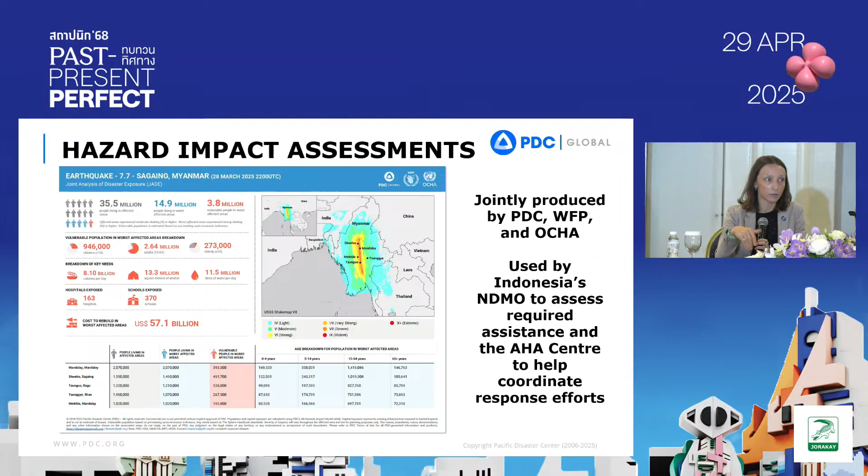This product we actually continue, although we don't have an active project with the Indonesian Disaster Management Agency, BNPB, at the moment. We do maintain a very close working relationship with them, and they indicated that they used this product to assess the required assistance from their side. They were providing support to Myanmar, sending support, and so they were able to utilize their version of the system, the InAWARE system, which would also have this product. This product was integrated into their system. They're able to access this product through their system and use that to make their decisions about what kind of support to provide. And similarly with the AHA Center, they use this product and are able to glean a lot of information that can be used to support the response.

That's all I have. Welcome any questions. Thank you very much.